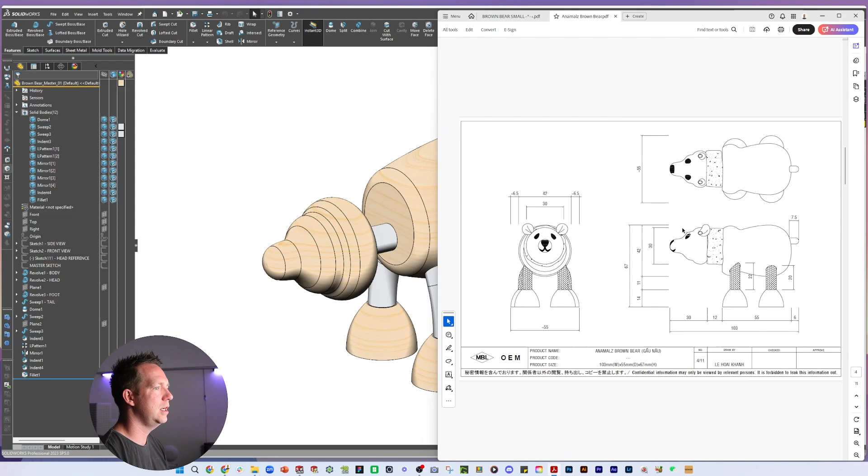First step is I'm going to rename a couple of the bodies. Before I do that, I need to make a couple more changes. One of those is the tail — I need to change it so that it matches the original. For that, we can go back to the master sketch, which is here.

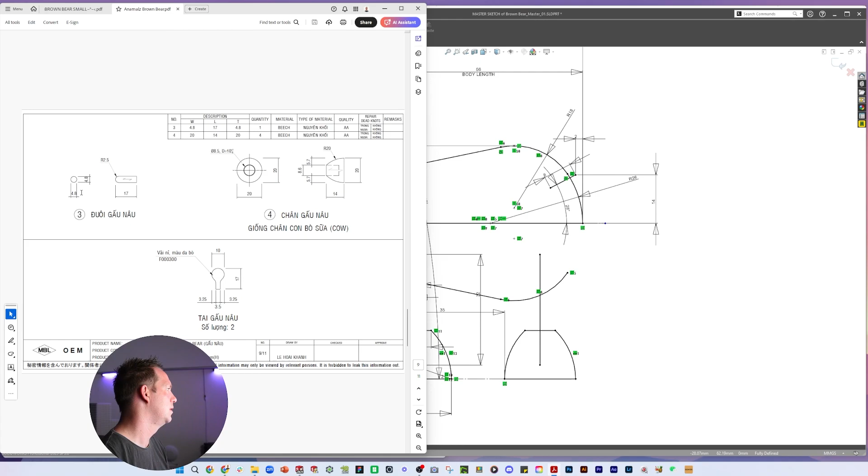If we look at our reference drawing, going through the file that has that — here we can see there's a hole that is 5 mil diameter. And if we look at this part here, we can see there's a 5 mil pin that's 17 long, with a radius of 2.5 on the end, but it's a 4.8 by 4.8 part. So we're going to tweak it ever so slightly.

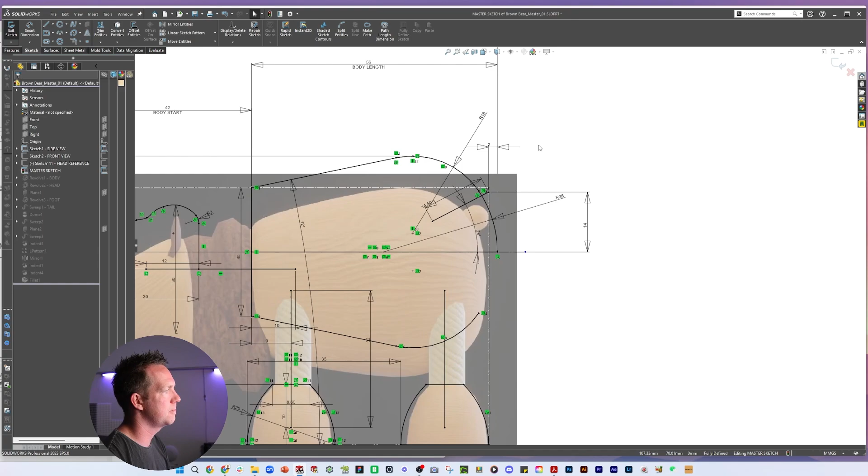17 with a 2.5 radius means that it's 14.5 deep. So if we change this 8 to a 14.5 — and I think we'll keep the angle as is, because that's what the artist changed here. Even though we're keeping it the same size, we might get it to stick out a little bit more, like this. Looks pretty good. We're just changing the size of the actual part, so the factory's reusing the original.

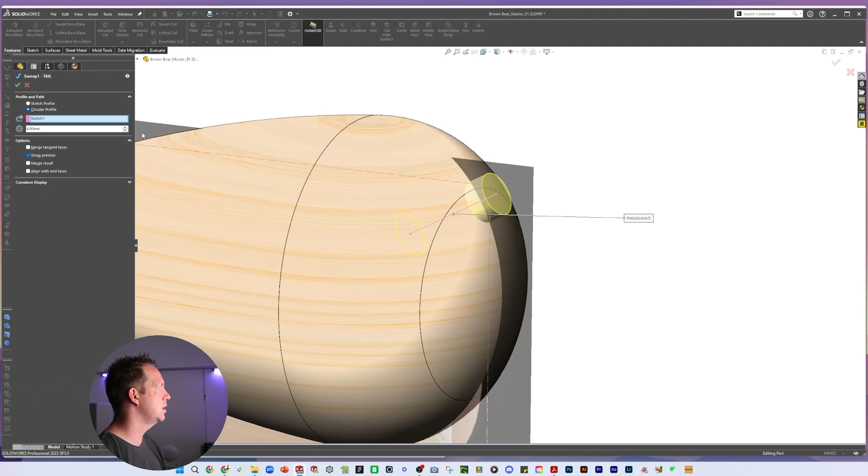Okay, so I've just updated that master sketch. I'm going to come into this sweep here and change that feature to be 4.8, and then the dome — oh, this is already 2.5, don't have to change it. Because we used the indent feature earlier, that hole's already done and updated. Super quick, very happy with that.

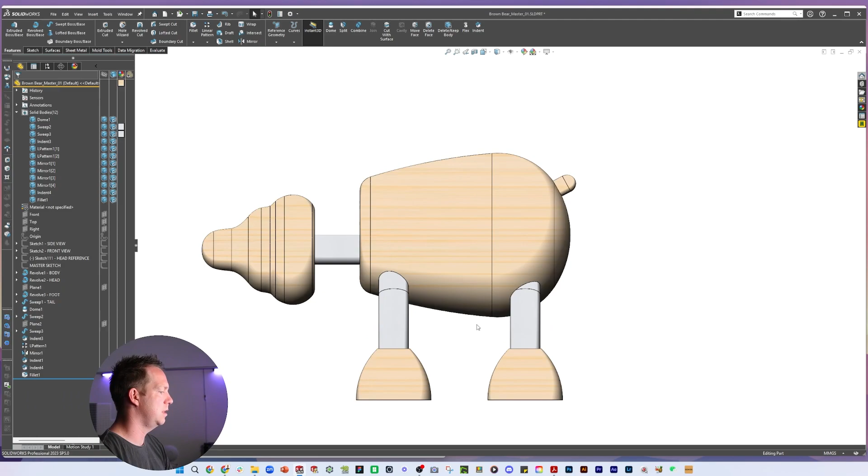Now let's move on to the next part, which is renaming a couple of the bodies in preparation for splitting out. This step is only required in one of the two methods of splitting from a master file, which is the one I'm about to show you. So let's name them — brown bear tail.

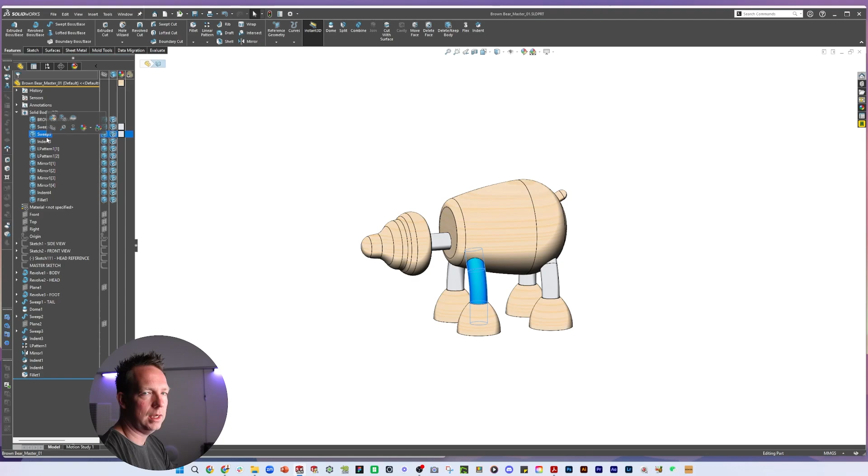I'm not going to name the parts that I don't need or aren't too worried about. I'm only going to do one of the feet, so I'm not worried about the other ones. I'll hide those bodies. Here I've got the brown bear head and the brown bear body. The reason I've hidden those bodies is because they're repeats — repeat feet, repeat legs, neck, leg. So I've got 6 bodies that I'm going to continue with.

I'm going to save, and here's the tool we're going to use — we go Insert, Features, Save Bodies. I'm going to click auto assign titles, and you can see it's naming those parts based on the body names we've given them. Now let's just think for a second here.

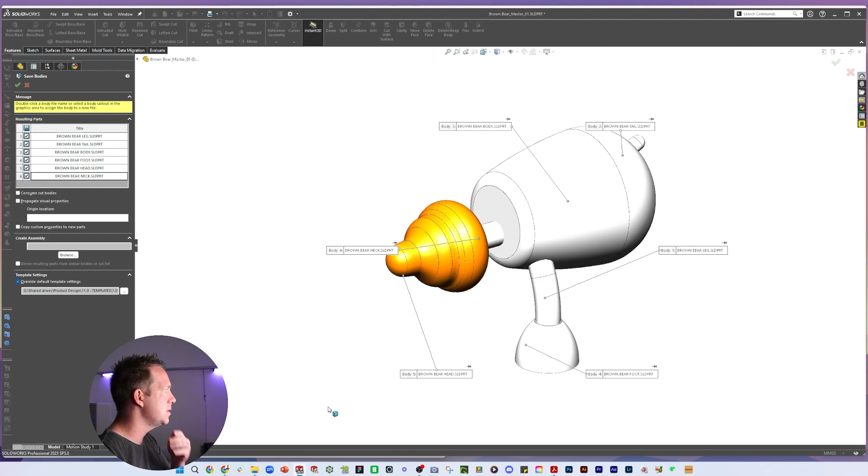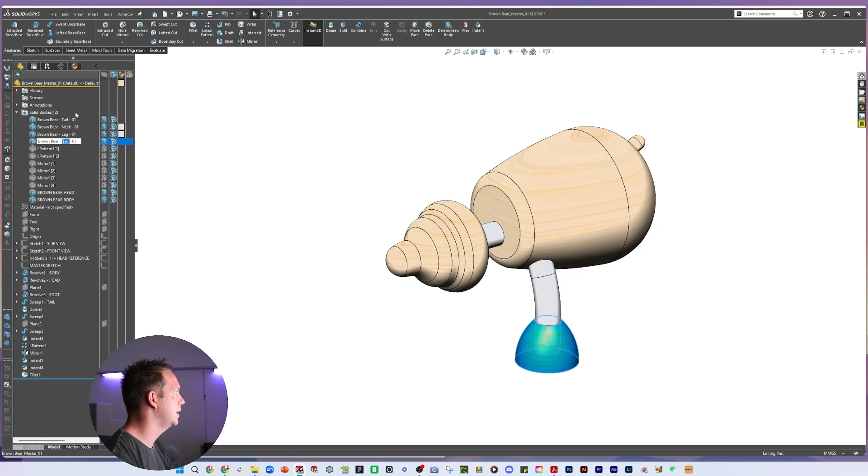Before I press save, I'm going to tweak those titles to match the formatting I've done for my other files. So, brown bear tail -01 — that's my format. I'm going to paste that across all these so we've got consistency. I very much like having consistent files — makes things look neat, makes it easier to find what you're looking for.

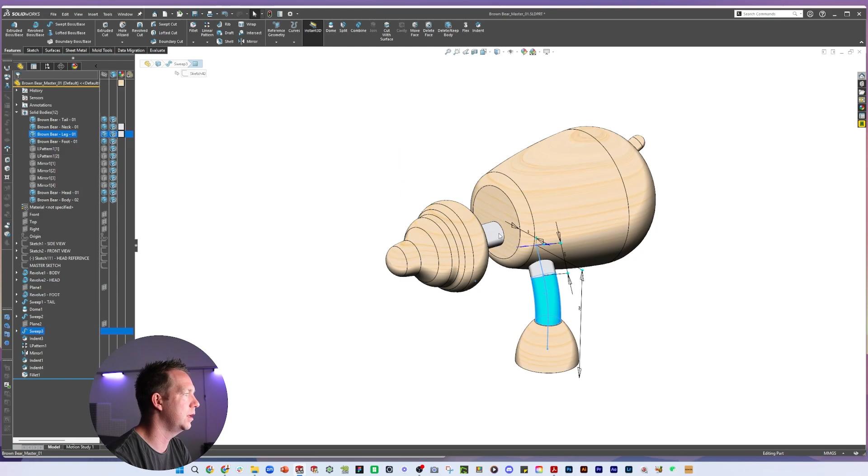Now the interesting one — I'm going to put body, it's going to be body -02. Head is going to remain as -01. Everything else remains the same. The reason everything else remains 01 is because this is using the existing part — we can assume these are the existing parts. We know the body is the only body that's going to change; that's part of our brief from our client. We're just changing the body shape, and we're going to change the artwork that goes onto this head.

All right, so now that we've got those parts named, let's go to Insert, Features, Save Bodies. We can see I can go Auto Assign. Those 6 are highlighted, and those 6 are the only ones included because everything else is hidden. So those other ones remain in the file, but they're not going to be used when I do this Save Bodies feature.

The other thing I'm going to try and do, which doesn't always work, is create an assembly at the same time. So my file name for the assembly will be 030-01 Brown Bear. Now override default template settings. My parts are going to be the animals part. My assembly is going to be the animals assembly. And let's press OK, and let's see if this works.

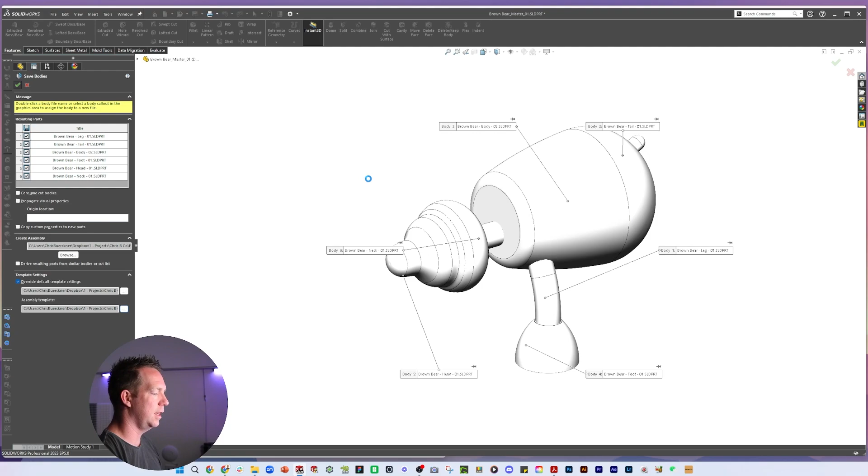So what I'm hoping for here is for each of those bodies to be inserted into a new part file, linking back to this, but having just that body in that part file. And then for SolidWorks to combine those 6 parts into a new assembly file with the name that I've given it, everything would be fixed in position based on the positions you can see in the master file.

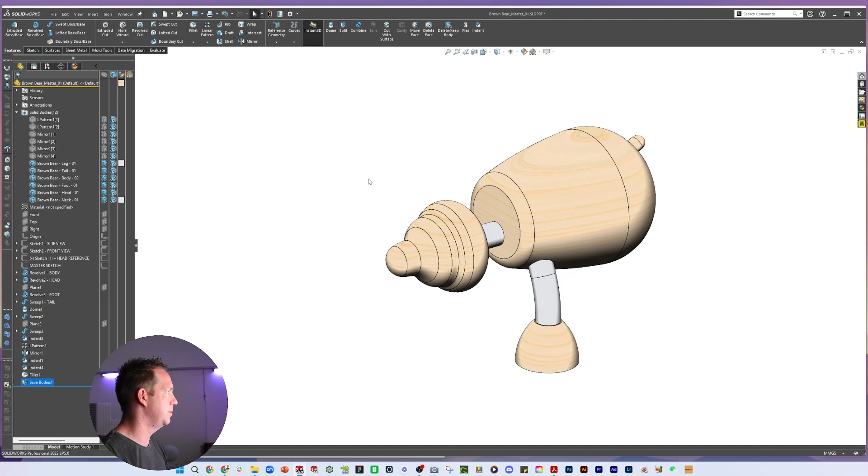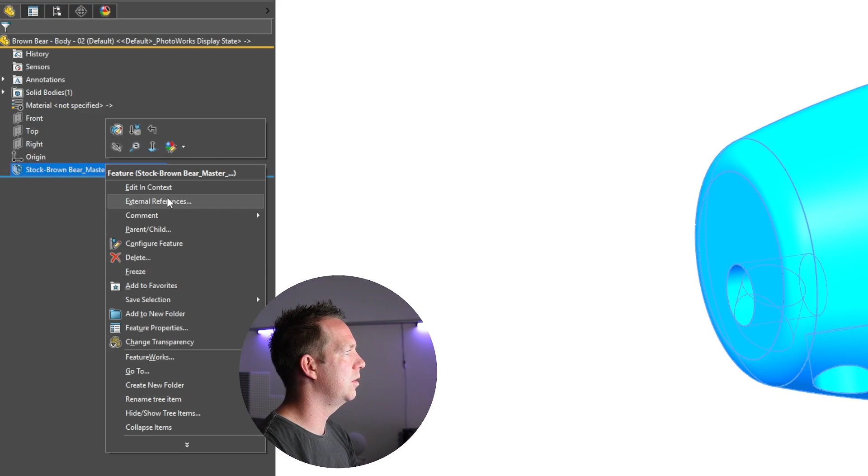So I can see in my Windows Explorer just to the left that those files have been created. If I Control Tab, I can see now there is an assembly. I can see that each of those bodies has been split into a separate file. And if I open one of those bodies, like the actual main body, I can see what is in the feature tree. If we zoom in here, stock brown bear master 01. And if I was to right click on that and go edit in context, it's going to take me back to the original file. So that would be a success.

Now in my master file, you can see at the bottom here is a feature, Save Bodies 1. Let's explain how these files are linked. Everything above this Save Bodies 1 feature will impact and carry down to the child parts, such as this, so long as they are above that feature. If I was to delete or suppress this feature, all those parts that I've created would disappear.

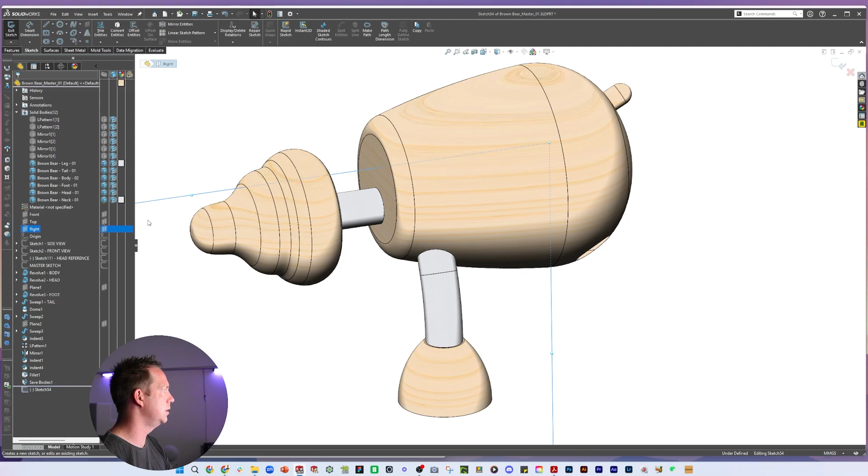And then the last thing to note is if I add a new, let's say I put a hole in this file, and I did a cut through all, and I save this file, look at that body, nothing, no difference. If I move that cut above the Save Bodies feature, just hit Save, Control Tab, you can see that hole's now included. So this is where some people can get caught by using this method.

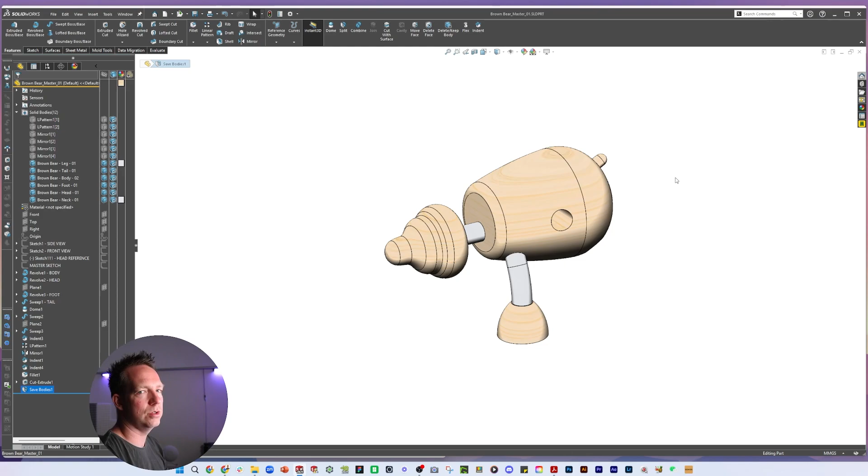Admittedly, I don't use it. I use the alternative most of the times, but it is a good skill and good knowledge, a good feature to be aware of, to use in your work.

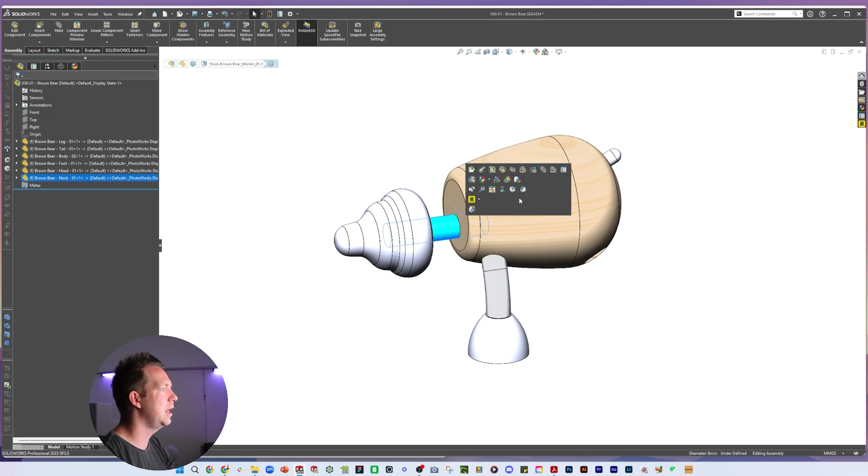All right, so with that done, we can now, I'm just going to copy some appearances across, and just copy the leg material as well. Go to my assembly, paste that onto that part and that part. And now I can go to the part file, save and close. I don't need that file anymore unless I was going to do other edits. And let's work on the assembly.

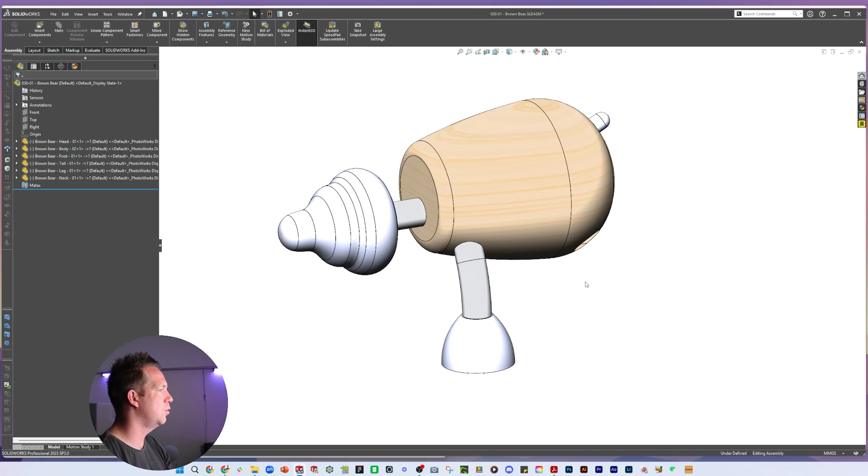Now, what I like to do is have everything fully defined. And I also like to have things in a certain order that would make sense. In this case, I want to put my head at the top, have my head, body, and foot as the 3 wooden components at the top of the tree. And I'm going to simply mate the origins to the origin. Now, you could keep everything fixed in place and the positions wouldn't change, but it's always best to have your elements fully defined, even if that's just a simple coincident mate with the origins.

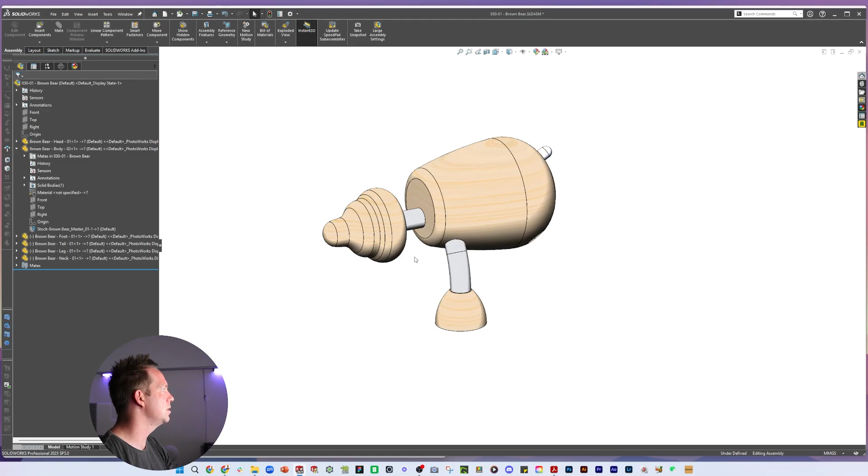So I'm going to save that file, and that's a bit annoying. Why has that happened? What's with the appearances? Apply, save, and apply. One more.

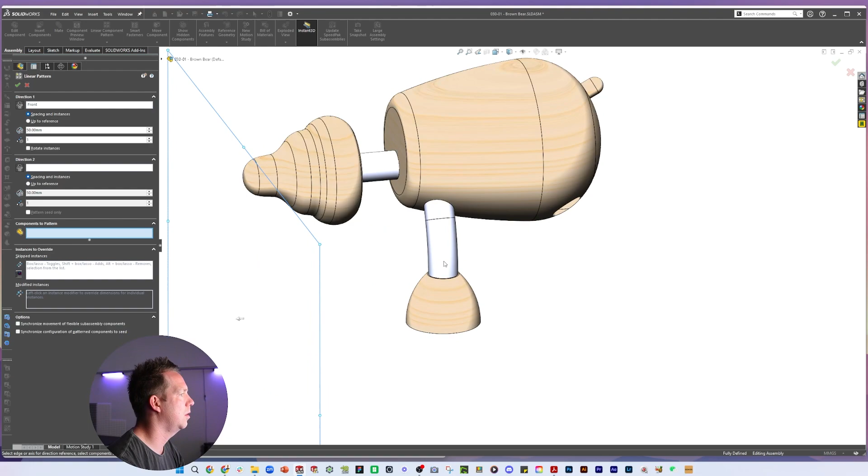All right, now our legs. What can we do about our legs? Well, we have 2 legs here, which were done with a linear pattern. And we're not going to worry about using references. We're just going to use our memory and dimensions to get those legs in the right place. And then we're going to mirror those, okay, for a very quick result.

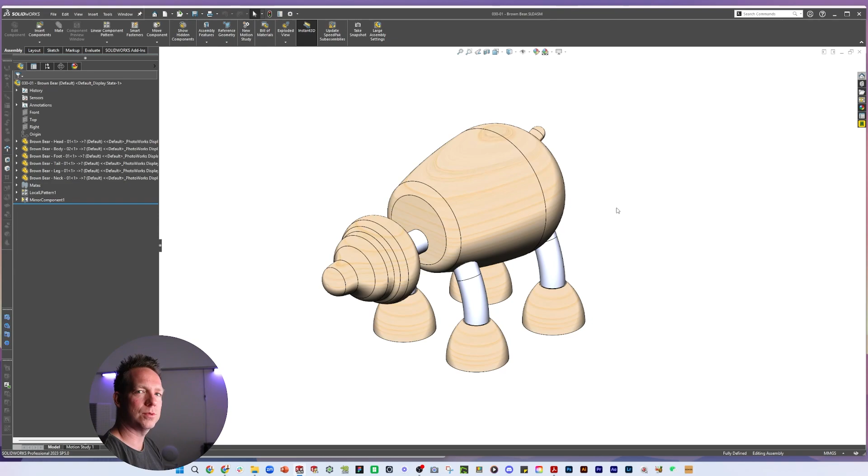All right, there is our bear, our assembly. And we are now very close. Well, we're now in a position to create the deliverables we need for this project. Those deliverables are an updated drawing or file for the body, and then an updated artwork file for the face painting on the head.

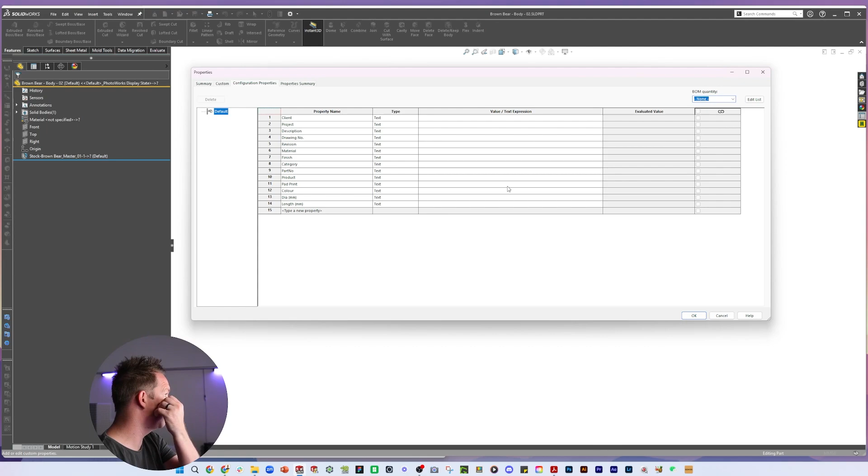So let's start with body, and we're just going to create a simple drawing for this. We're going to use some properties. We're going to give it some names because these carry through to our drawing. We're going to use description, category, product, brown bear, pad print, none of those applicable. Material is applicable, but only in the assembly.

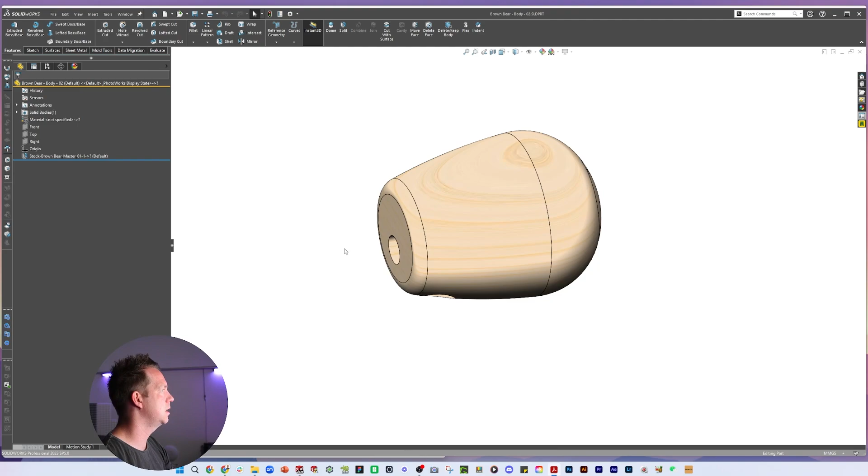That it's going to be applicable in this file. What we're doing is creating a drawing just like this one here. We're not worrying about the art on the bottom. We need to create this kind of drawing to show the dimensions.

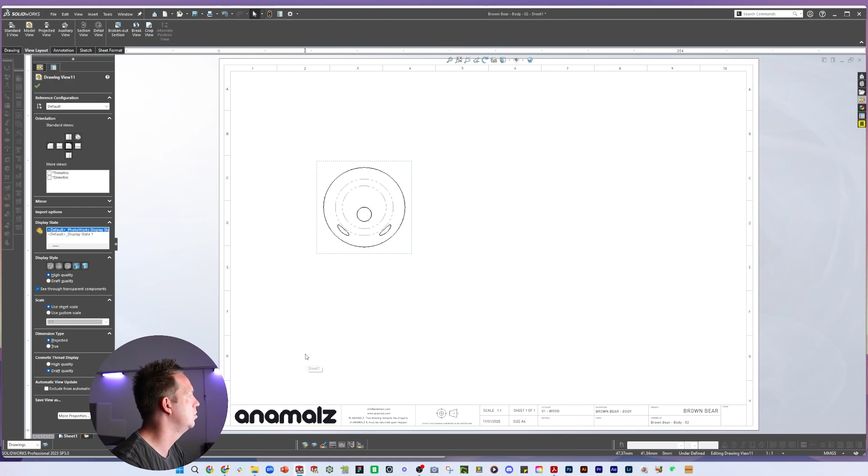So let's go to make a drawing. It's going to be Anamalz part, and we'll start with a view layout of the body from a front view. I'm going to get rid of that automatic center line, change it to hidden lines, and then do a projected view and another projected view, 3D corner. Now that one I will change, since it's not necessarily the angle I want, so I'm going to tweak that again.

Scale is 1:1. So in this file, my aim is to communicate the new shape of this part to the factory and identify to them that it is the brown bear and the body.

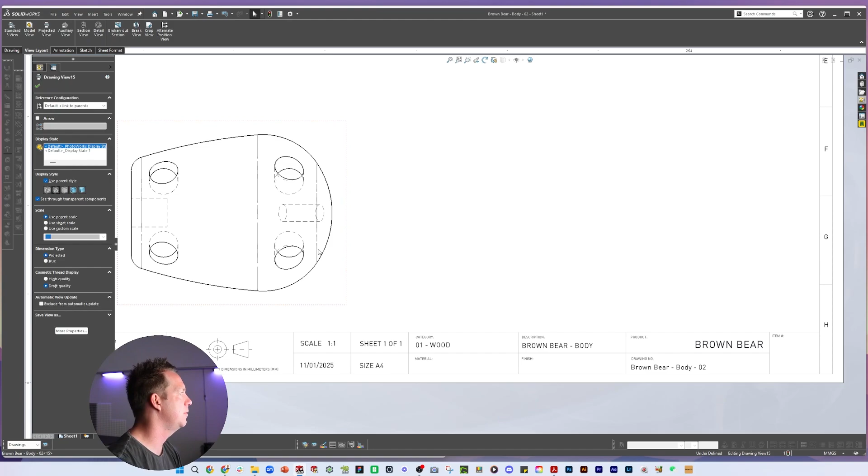Now let me update the material. The information for the material, just going to put that in. Material: beechwood, and for the finish, there's an acrylic lacquer. Okay, and that's going to populate in our drawing.

See here, we don't have an item number. It's fine, we do have now the remaining information to go. So very soon we'll do some dimensions. Let's just do a bottom view.

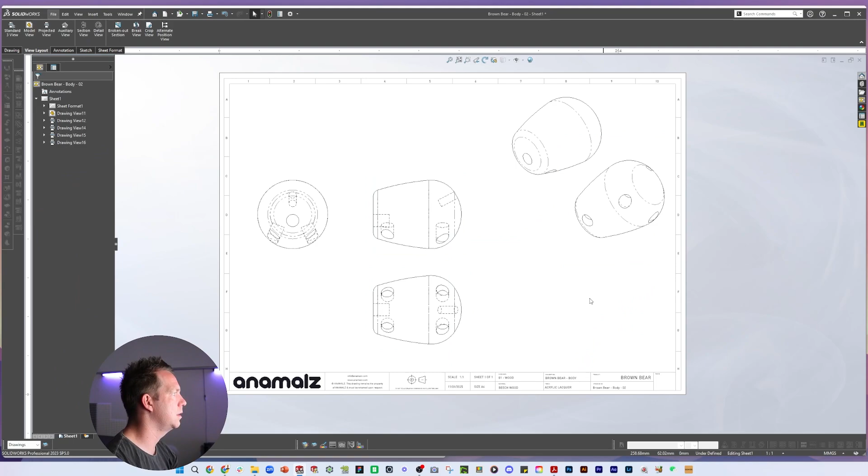Okay, so I've got a couple of 3D views. Now let's add some center marks and some center lines. I want these center marks to be on a format layer, and I want them to be black.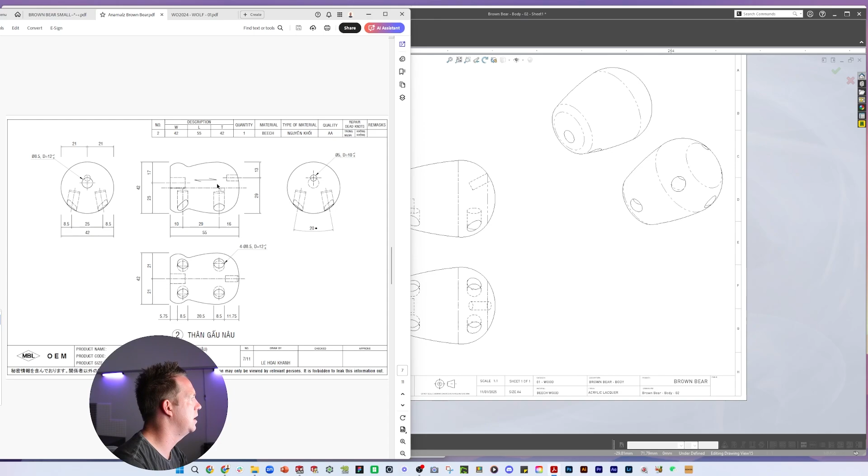I'd rather do the center lines and the dimensions you can see on this top view or the side view, and have dimension callouts, angle callouts. Not going to use a center mark for that, but we're going to use the center lines, particularly on these sections here.

That one's already in the middle. This neck hole, tail, legs - no point on that one. All right, so what dimensions do we need?

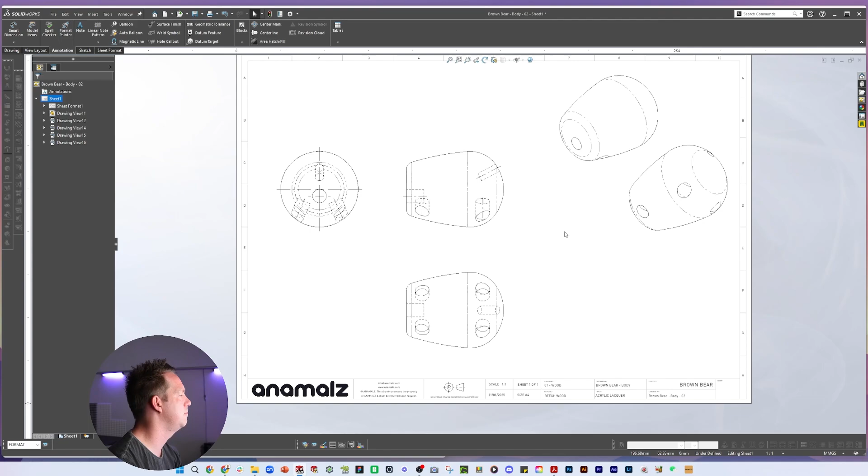We're going to look at the tire shape outside. We will do the angle between the legs, and we're going to just simplify it down so that the factory can actually replicate it. Because the factory obviously can be 47, like plus or minus 2 or 3 degrees. It's not going to be a problem. I wouldn't expect it to be a problem.

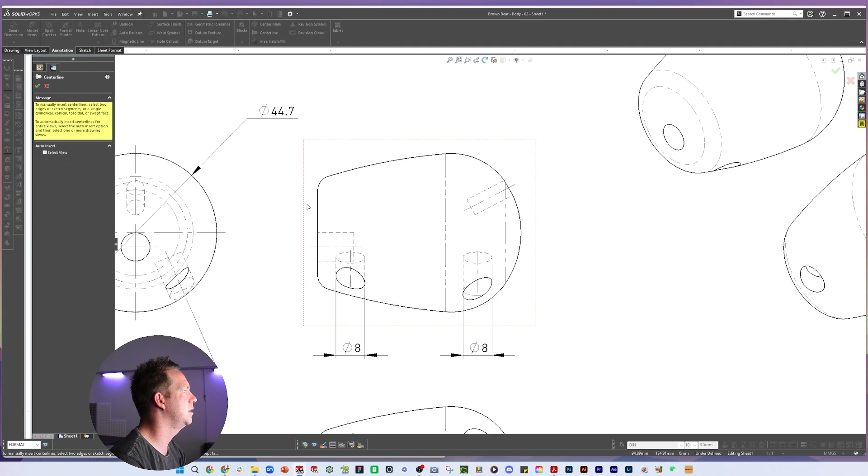It'd be nice to get a center line through the middle of this, but I don't think that's going to happen. Probably have to do just a construction line instead, like this, for construction. And then what I can do on this shape is put a few radiuses in.

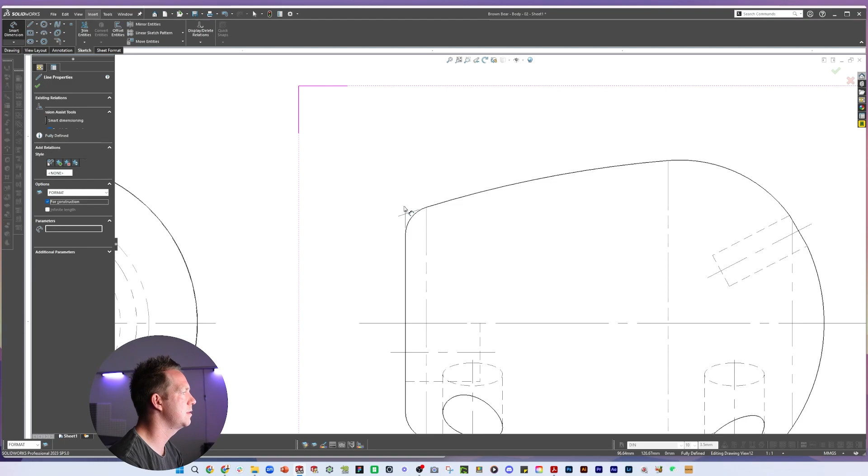First, let's put a point in. So you can do a point between two lines to find the actual end point of the radius, like that. Can't remember this - sorry, I can't remember the correct term for it. Might be able to get it later.

So here we're putting in a couple of radiuses. You can see the different shapes that make up this object. I always just try and move your dimensions around so they're clear to read. And then I want to find the center point there and the center point to this end.

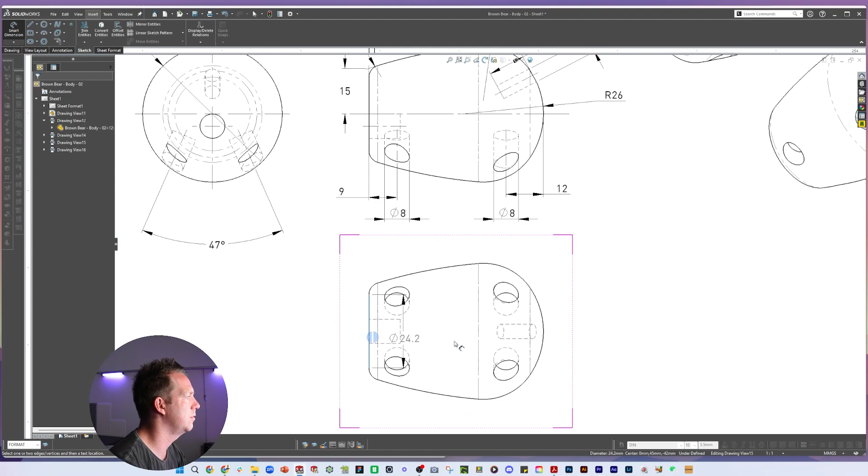Nice. On this view at the bottom, I can do the full width, 56. I can do the depth of that cut as well. Now, does that tell enough information about positions?

Not necessarily. I think what we can see on this drawing is here, they've got the whole center point of the hole on that face. So we can replicate that. Just going to put a sketch point there.

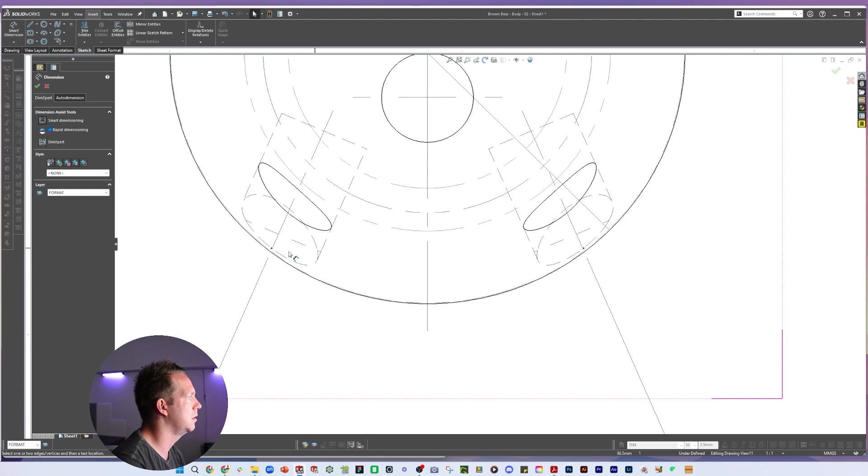To dimension between - may not be perfect. I'm going to go to 0 for the clearance. So we've got 27 there. We could round this up as well - 45. Now, I think that should be enough information.

Perhaps just the center point of the tail and the angle of the tail. That'll be enough. A little bit messy now, but all that information is there.

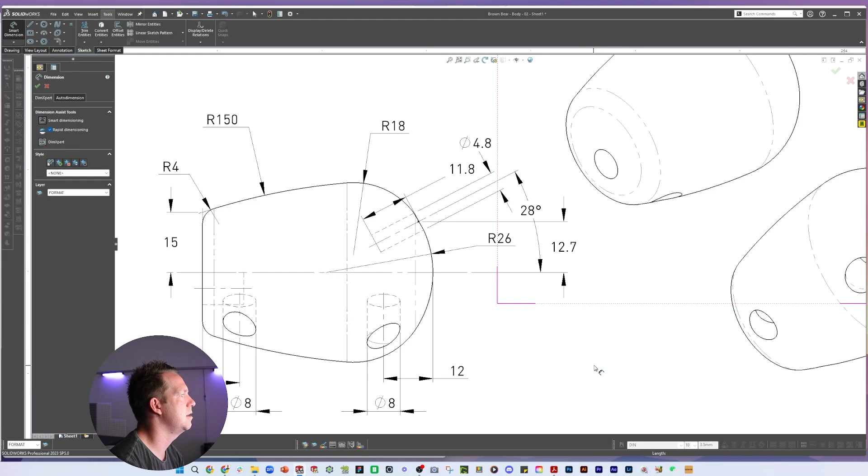Let's just put a couple of notes in. Side, bottom, 3D views, and find a good place for those annotations. Just going to squeeze things up. Let's move this right up, get a bit more space.

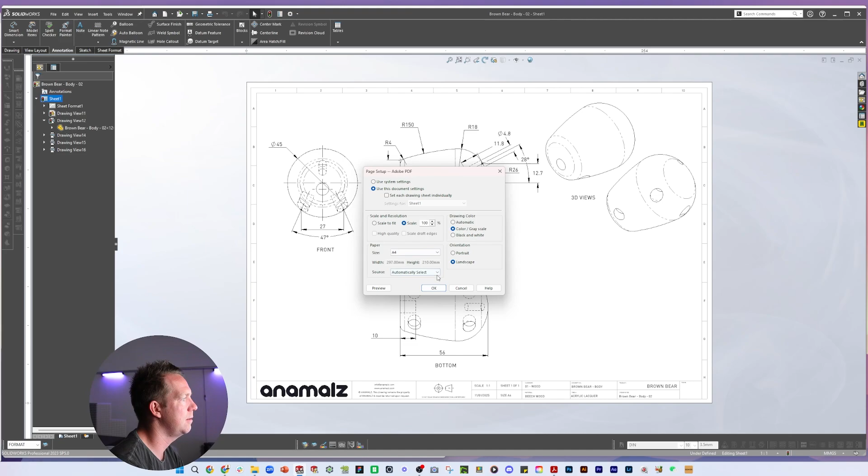And let's save, save that. File is saved. And to print the drawing, to save it as a PDF, I use print, Adobe PDF. Just always check the size scale is right. It's okay. All right, found a folder, name my PDF, save. You'll then see the preview come through.

All right, so that's the drawing done, and that'll wrap us up for this little series.